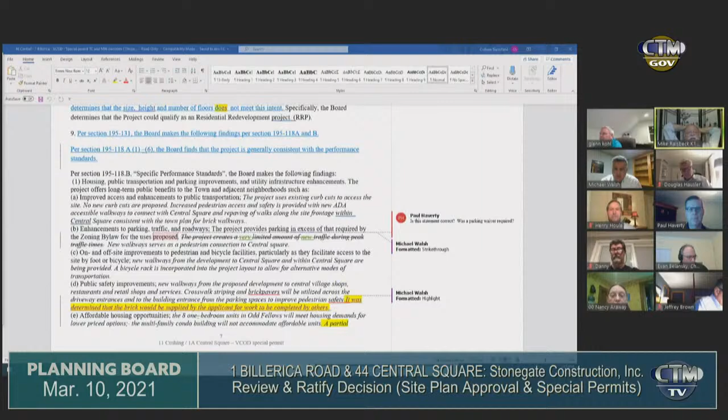So maybe to simplify this, Christina's letter is noted in procedural 7. I don't know if you want to put this level of detail in your finding, or just rely on the contents of her letter. You can take it out. I'm fine with taking it out, I'm sure it was my comment, so if you want to take it out, that's fine. If the board feels it's not necessary, take it out, if it's not accurate. Well, it's more accurately covered in the letter. Okay, take it out. Thank you, Evan.

Okay, continuing on, 9E, this refers to affordable housing. The highlighted text says a partial payment in lieu has been proposed for the creation of affordable housing elsewhere in town.

The board never came to an agreement on the PILO. We looked at the PILO, we looked at the project PILO as a whole. I think, Mike, this may have been your insertion. I think this might have been... I don't know if it's Nancy, I'm not going to put words in your mouth, but this was just directly regarding the 8 one-bedroom units. We were looking at it as a whole, we didn't get into a discussion regarding the PILO for just the 8 one-bedroom units. Correct me if I'm wrong, anyone on the board, I don't know if you remember that.

I agree with you. So since we are deliberating, and I agree, the board never really discussed whether the 8 units should include an affordability component. And I think the board understands that it wasn't necessarily calculated as part of the PILO. Are those facts as we understand them?

I would agree with that, Evan. And is it also safe to say that the board didn't express any major concerns related to the 8? No, I think it's simply more that we never got to it. We were looking at them as a whole, not individually. We discussed the PILO at length but never came to a final conclusion on the project as a whole, including the 8. We never specifically separated the 8 and talked about PILO. That's correct, that's where I'm caught on this one.

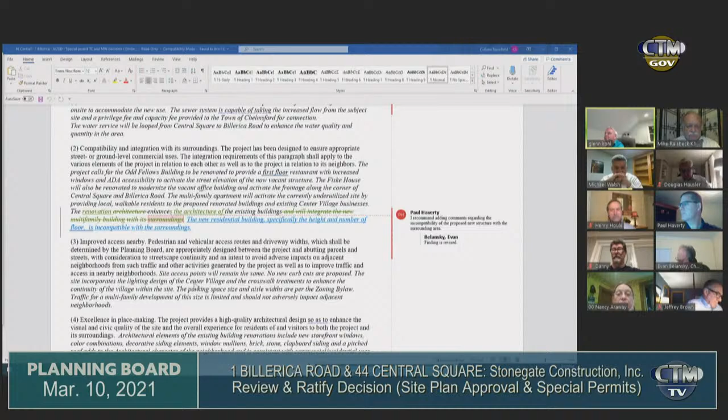Okay, next one, middle of page 9. Letter C, this is specific to the design standards. So counsel again is recommending we add more detail between Nancy's edits and my edits. I think we've covered that. I specifically included 3 floors are permitted, 4 are proposed, and a height of 35 feet is permitted and 48 is proposed. Satisfies me, that's accurate.

Okay, the next one, I think Mike you inserted this one. Right, and I inserted the next line where it says it was not determined if all mechanical units were to be screened from view. They were proposing a screen of 36 inches above the roof line on the flat roof portion. Do you guys recall that, or you want to leave that in or take it out?

I'd leave it in. It wasn't determined. The key thing here, it wasn't determined that it would block all the units when they were proposing the 36 inches high. Right, the screening was to hide the units, but like you said, if they had a couple units that were too big, they didn't address that. Yeah. But you probably should fix the spelling in it. Reno? That's why you know it's me, so. I left it in there.

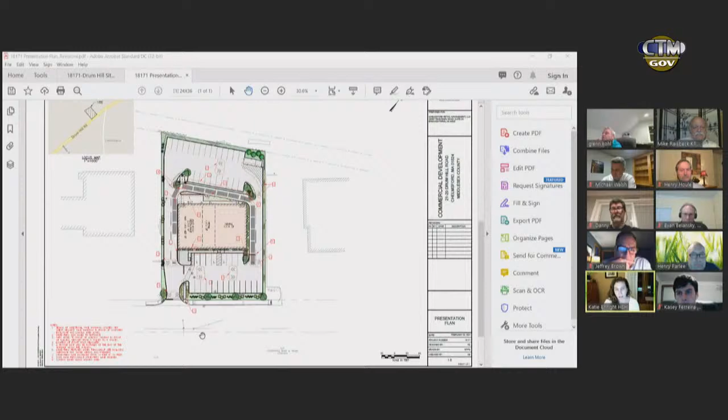Okay, this might be helpful. So this project was previously approved by this board quite some time ago. We went through the COID and the full site plan review. So we're here tonight with just a minor modification. As you know, the building right now is outfitted with the Verizon store that used to be in the previous building on the site, and a dental office. They've since found a fast food restaurant tenant for the drive-through location, and so we're here tonight with some minor modifications. Basically, these little areas in red are what's on your plan today - a lot of it has to do with parking lot striping and some additional signage, things like the arrows shown within the parking lot.

We made the drive-through lane slightly wider than the previous approval. There's some striping in front of the dumpster areas, some additional signage. The previous decision had allowed us to add a patio in front of the building, utilizing one of the parking spaces, and this tenant does require the patio, so we're showing that here, which removes one parking space from in front of the building. We've also added a bike rack to the plan and shifted the front door of that fast food unit slightly from where it was previously. So we're here tonight just seeking these minor modifications to the site plan previously approved by this board, to allow us to move forward with this additional work on site.

That's it. All right, is Christina still available? Sorry, yes, I'm here.

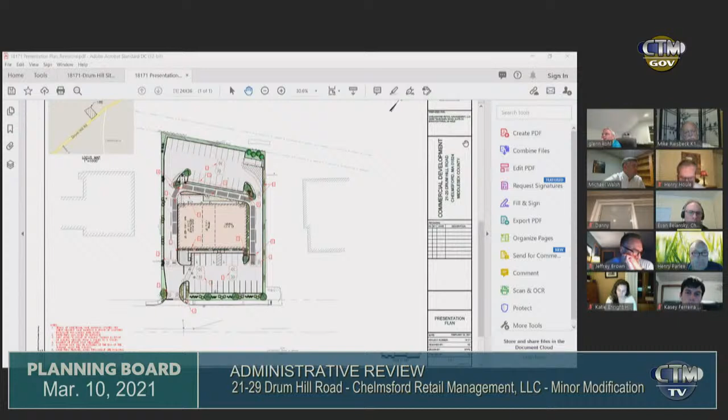You said there's a letter from the fire department? Yeah, there should be, give me one second guys. Evan, I'm not finding the one from Dan. I think you're muted, Evan. While I'm looking for that fire prevention letter, was there one from Board of Health? Board of Health didn't have any concerns. Okay. Let's see, the only one I got from fire prevention today was for 248 Princeton. I have Dan's. Oh you do? Okay, yes, sorry about that.

Dear members of the board, the Fire Prevention Office has reviewed the proposed minor modification to the existing property at 21-29 Drum Hill Road and finds the following: the fire department apparatus access is acceptable and unchanged from the previously approved site plan. The proposed dumpster location is acceptable. The only concern raised by this office is that adequate vehicle impact protection be provided for the proposed expanded outdoor patio. The Fire Prevention Office would be amenable to the developer's guarantee that this vehicle impact protection would be provided at some point before the occupancy of the 2,723 square foot proposed fast food restaurant unit. This office would approve this plan with these conditions, and I ask the board to make this part of their approval process. Captain Katufis.

I also had one from North Chelmsford Water, no concerns.

Those are all the letters. We'll put it around the board, see if anybody's got any concerns.

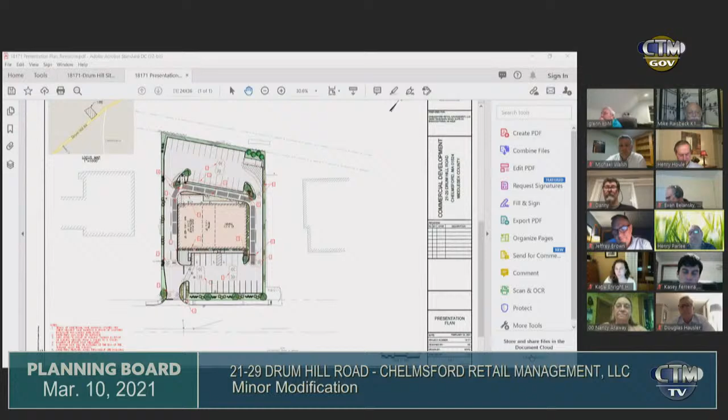Glenn, yes. Mike Walsh, yes. Mike Raisback, yes. Don, yes. Nancy? We lost Nancy again. Nancy, yes. Cool. Yes, I'm a yes, unanimous.

Moving on, the one that I think everybody here is looking for is 39 North Road, Matt Hansen. He's looking for a special permit under 195-8 for non-conforming use of structures, changes, extensions, alterations of a non-conforming structure and other structures, and any other permit relief that may be required under zoning bylaws to allow change of existing and altering of a current or pre-existing non-conforming use, two-family or a structure of a new two-family on the property.

Matt: Good evening everyone, thank you for having me this evening, good to be back. I do have Brian Melissi with me, and at this point I'd like to ask him to bring us through the application, unless there's anything else you'd like to hear from me right now. He's got all the good details. Oh, I can go for Brian.

Good evening, Mr. Chairman, members of the board. For the record, my name is Brian Melissi with Whitman and Bingham Associates, here representing Matt Hansen, who's the property owner. We're in front of you tonight, as you read in the notice, requesting a special permit under section 195-8B, non-conforming uses and structures.

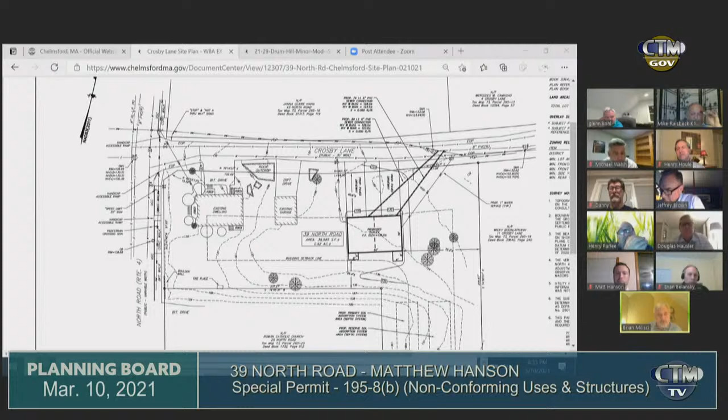All right, Colleen, you said you had a few letters on this? Colleen? Colleen? Christina, do you want to read yours? Hi guys, I have them. I'm sorry, I couldn't see anything with the shared screen up.

This one is from the Board of Health. She says the new two-family home would be required to have an on-site septic system due to the current moratorium to tie into the town sewer, and would need to meet all the Title V state code requirements. That's from Board of Health, Sue Rosa. Captain Kutufis from Fire has no comments, and Lieutenant Spence has no comments.

That's all I had. And Christina has hers too. Let me see if I can find it. I can read it if you can't find it. I have it up now. I can read it. Why don't you do it though? You're better with this. Okay.

Dear members, this office has reviewed the site plans by Whitman and Bingham Associates, consisting of one sheet dated February 10th, 2021. As a result of this review, this office has the following comments: One, this department shall be notified when work on site is to commence in order to arrange for inspections. Two, the applicant should mitigate stormwater runoff from the roof; any revisions to the drainage system shall be submitted and approved by this office. Three, a stormwater operation and maintenance plan shall be created and followed as described in the report; copies of any inspections or other reports done in accordance with the plan shall be forwarded to the engineering office.

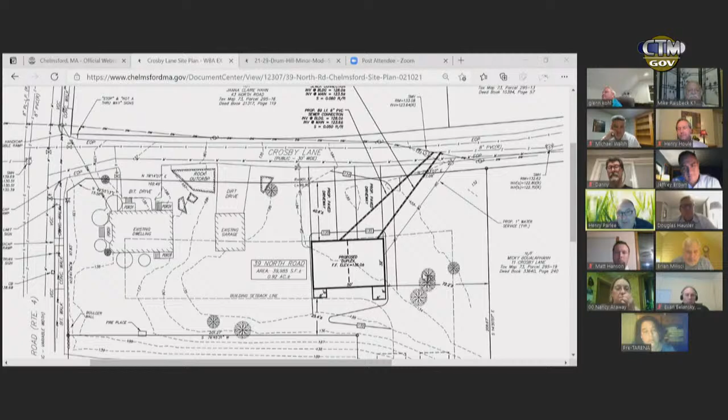I think they're saying it's the two-family, and that's what I don't understand. It's not zoned for two-family right now. But it's old. No, it's not. The lot is, but the house, the existing dwelling is, but we've got to work amongst ourselves and work something out here, but I can't. All I can say is stay tuned and listen to the rest of the meeting, and you'll get what we come out of this eventually. Okay. All right, Matt.

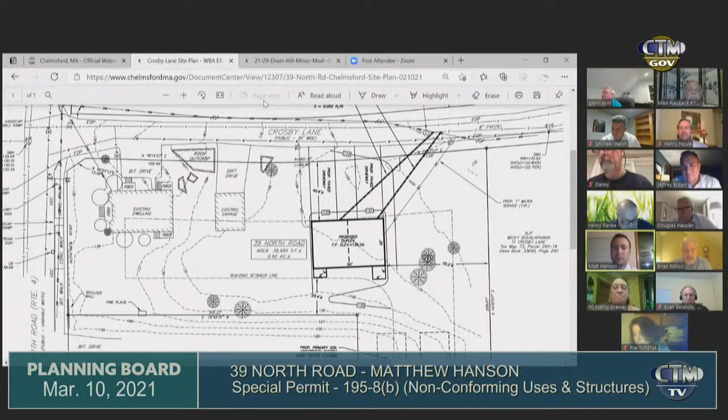No, thank you. I really appreciate all that feedback and those comments, particularly from the board and all the neighbors. Just wanted to start by answering a few of the questions that were brought up.

To that last question, my understanding is the difference would be homes built before the 1930s can legally convert now to 2-family, but that's different. This house was actually constructed as a 2-family, so it's always been a 2-family. That's basically the main difference. And I think that goes in line with a lot of the other questions about the Doyles and the Greenwoods as well. If this is approved, then there's a precedent, and other big old homes with land would just go and do the same thing. But those uses are not non-conforming.

There was a lot of questions from the board members about the specific section being applied under, and I am by no means a zoning expert or an attorney. When I first met with Evan to discuss this, he recommended I bring the whole proposal by town counsel to get his opinion on it. He reviewed our zoning bylaw in several cases and said this was an allowable use. So I wouldn't be here if town counsel hadn't said that it was allowable.

Again, not a requirement, but certainly that it is an allowable special permit application. That being said, if the will of the board is that there's a better avenue, or you'd prefer to see a zoning amendment change, I'm certainly willing to look at that avenue as well. Not trying to force something on anybody that's not allowed by zoning or comfortable with, but this path was recommended to me by a few people, and I was told by town counsel that it's allowable for your board to review it in this manner.

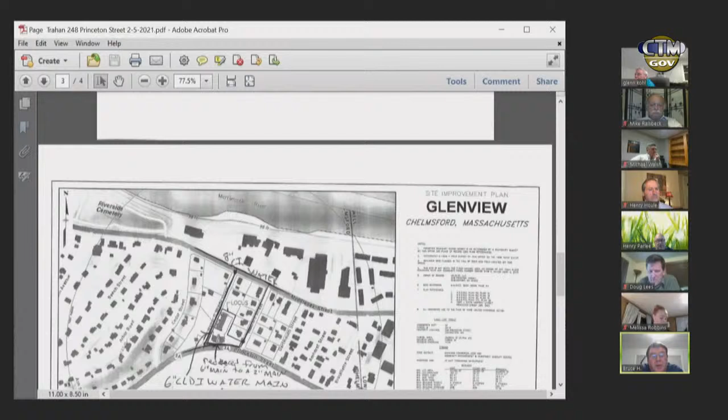I can just kind of touch base with what Doug and I have discussed, the engineer for Trahan and Page. The original plan showed the water main going from Princeton Street up Weed Street, terminating at the property line of the Merrill property. Doug and I talked, and I said we do not allow dead-ended water mains, especially where they can be looped. So I recommended we downsize the line from 6-inch to 2-inch, saving some money, and the water line would tie from Princeton Street and get a second feed into Middlesex Street. He wasn't for this, so he showed a loop going around the buildings, which is very unacceptable because all it is, is a dead end loop. It has no purpose. So that's where the plan is at now.

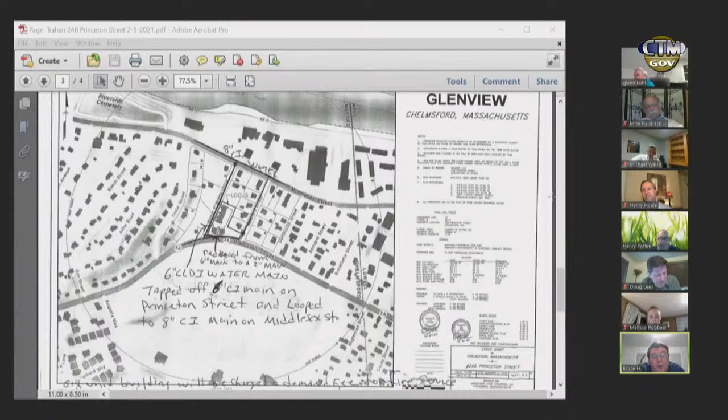The fire department, I talked to them, they're all for my recommendation. The water district is for my recommendation. And we did a water distribution master plan, and the master plan prohibits dead-ended water mains where they can be looped. So going forward with this plan, we're going to stick to our plan of the feed for redundancy from Middlesex Street to the property and also from Princeton Street to the property. I'm sure that answers your questions.

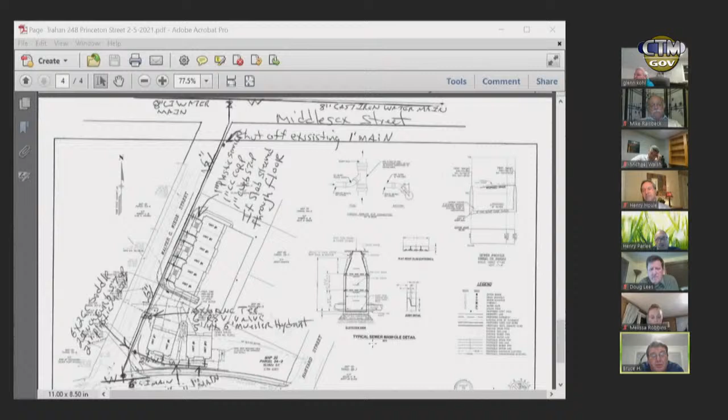So you want them to go to Middlesex Street twice, basically, right? Nope, I want them to go from Middlesex Street all the way down to Princeton Street, tie in the 6-unit building straight as it's shown on this plan that I kind of doctored up a little bit. And they're gonna run a 2-inch water main in front of the 2 duplexes, tie in those units straight. Doug showed an additional plan, which I rejected, showing a loop going around the buildings on private property, which is unacceptable.

And like I did tell the engineer, the water district has in the past worked with contractors—for instance, Groton Road, we're doing some waivers on some of the fees. With 314 Dunstable Road, they're gonna loop the water main through to Stone Hill. So we showed past history, told them that. We had them loop up to John Street.

So this is nothing new that we're making them loop the water main from two different directions to get redundancy to feed this project.

Mr. Chair, if I may briefly, I don't know if Mr. Harper has had the benefit of the revised plans, but we have revised our plans to include this loop, including the loop all the way down to Middlesex Street. That's what was noted in Mr. Hedison's letter regarding the payment in lieu of, that's the additional fees. So we are now proposing this loop as Mr. Harper is requesting.

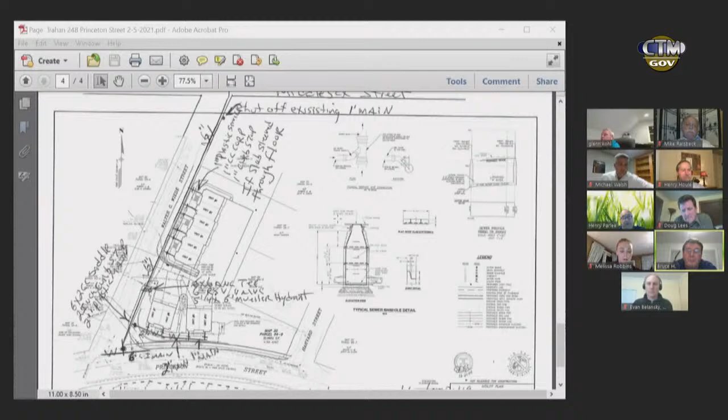Okay, I haven't seen that. I did mention that to Doug, and I didn't quite hear Hedison's letter. I did mention to Doug from the engineering firm that possibly this could be part of the in-kind service. I think Mr. Lees will go through it a little bit more specifically, but I know we're going to do some of the loops. So once we do the overview, when the letters are read, we'll go through that in more detail.

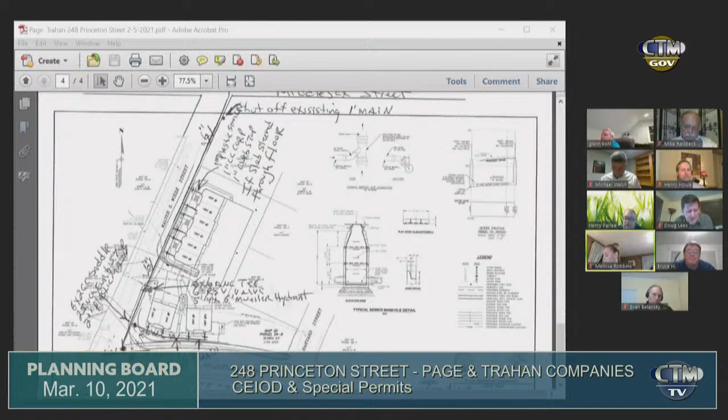And just one other point, if I could, to the chairman. This feed is also, we did some flow tests this morning up at the former training school, the University of Lowell. So looping these water mains, getting additional feeds into that area is going to help out that proposed subdivision. I'm not sure exactly what's going to go up there, but there's going to be a lot of activity up at the old West Campus. So we're trying to get as many feeds in that area as possible, and this will actually help out somewhat.

All right, Colleen, was there some others from abutters that we need to read in? I have one. Did you guys get them when they were sent to you? I'd appreciate some help reading these if you don't mind.

Should be Mike Walsh's job. Let's see, Mike, are you still there? I am, but give me a minute. Should be one from Brian Harper. Actually, while you're looking, I can read Brian's. Colleen, we also have the fire prevention letter. Oh, I have that up. Thank you, okay, we'll read fire prevention first.

Dear members of the board, the Fire Prevention Office has reviewed the proposed residential development at 248 Princeton Street and finds the following: water supply appears adequate. Required pressure and flow shall be confirmed by a current water flow test performed proximate to the site, with all calculations to be approved by this office. Hydrant locations appear to be adequate. One hydrant will be required within 60 feet of any fire department connection. An additional hydrant shall be available within 500 feet of all buildings for manual firefighting operations. Access for fire department apparatus is adequate.

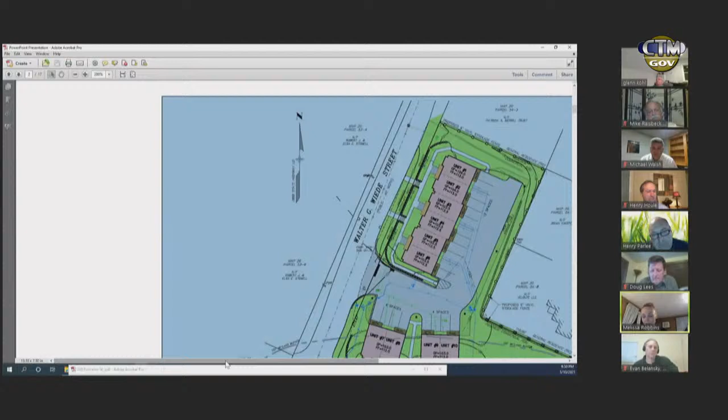As to the other technical issues, if I could just allow Doug Lees to speak briefly on those, and then I can answer the other questions that were just raised. Hi, Doug Lees from Land Engineering and Environmental Services.

I'll give you a real quick overview of the changes to the plan since the last meeting. We've increased the sidewalk width along Princeton Street to 5 feet. We've increased the curbing - we had proposed 5-inch granite curbing, and we've increased it to 6 inches per engineering's request. We've included a benchmark. We've updated the sewer layout so that each unit has individual sewer services, and those are laid out with anticipation of the water service going up Walter Wiede Street, so the sewer will work when the water is changed to address Mr. Harper's comments.

We added a little bump-out in the back top right-hand corner of the parking lot for the last parking spot in unit number 1, to back out and have a place to turn around, addressing the concerns raised at the previous meeting about the back lot line where Mr. Brian Harper's fence is. I went out there and looked - right now it's kind of a steep slope in the back, about a 2-to-1 slope, with some trees on it varying in degrees of health.

So what we're proposing to do is to grade that slope out and make it a nice stable 3-to-1 slope so that it can be loamed and seeded to be stabilized.

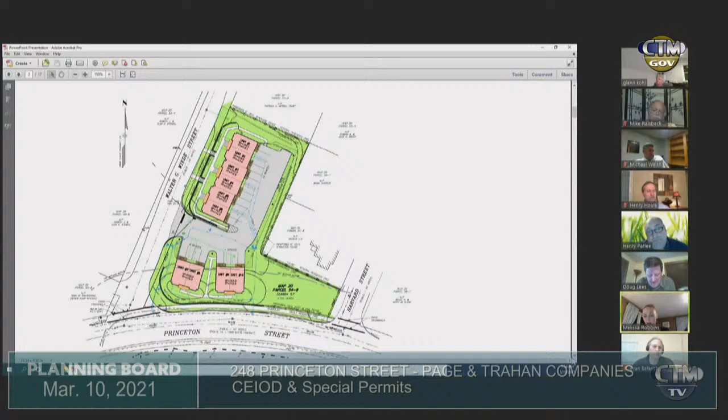All right, so Mr. Chair, just a couple other points - to Mr. Harper's point, of course we can work with him on landscaping. He is at a higher point, and oftentimes when there's an abutter at a higher point, it makes sense to do the buffering on their side of the property line if they're amenable, because it will give them better screening. So we'll reach out to see if there's a better fence type or plantings they'd like on their side. That's an easy fix to his screening issues.

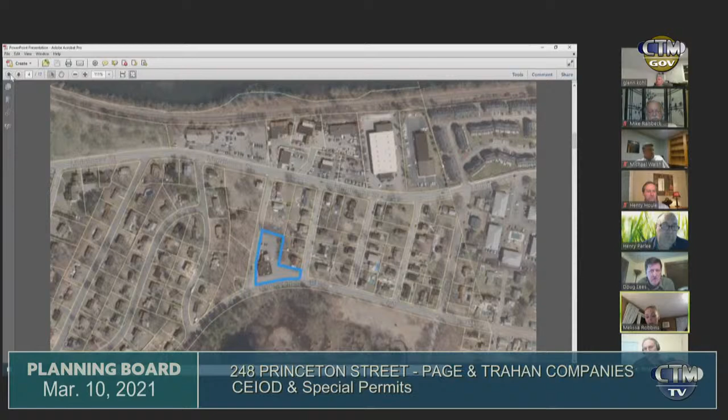Just to briefly answer some other quick concerns that were raised: we are offering a lot of mitigation on the site. This is a redevelopment site, obviously - it's underutilized property in the town of Chelmsford. We're going to redesign it to actually fit into the area, which is very residential. As you pointed out, the West Campus property is right across the street, and that will also be proposed as a high-density residential development. As part of our improvements, and even some of these offsite mitigations in front of the property, we're going to improve that sidewalk to the extent we've been asked to along Princeton Street. We also added 2 crosswalks, which were requested.

The biggest one, as we've discussed tonight, is agreeing to that water loop, which is an extensive cost down Walter Wiede, and doing the other extension so that we can improve the water line, not only for this project but for the town of Chelmsford. And as the water department pointed out, that will also help with future developments with this improvement.

I don't think I noted this at the first hearing, because I keep getting the floor at 9:45 p.m., but the market rate units for this - we're trying to stay in a price range about $379,000 as an initial price range. I think the board would agree that for the town of Chelmsford, for any new construction, that's untouchable. So when we're talking about market conditions, our sales, our prices per square foot, we're trying to keep it at that starting point. So that's where our market rate units are at.

As for applicability, the abutter is correct that there were lots of discussions at the applicability, but at that point we were at 12 units. We came in for an interim discussion with the board in October to discuss perhaps decreasing density before we went to full design. With the abutter comments and board comments, that's why we went to 10 with the payment in lieu of, instead of designing out the 12 units that had 6 to the front and 6 to the side, both on Princeton and Walter Wiede. I'll talk fast, I promise.

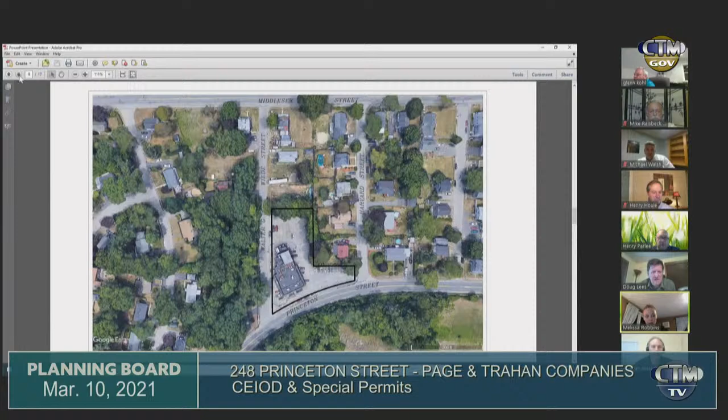Do you have a landscape plan for this showing any plantings along the streets at all? I know I saw the wall there before. If you go down, Colleen, to like slide 13, I think it was there - Mr. Lees had gone through it briefly.

Yes, okay, so this was the landscape plan that was presented. Doug, if you want to run through it quickly - the landscape plan has some shrubs, plantings in the front of the units and at the driveway entrance, and some evergreens along the back fence and the side. There's ivory silk, red maple which is deciduous, a lilac, white firs at the corner right here, and there's a little pocket park down in the grass area to the right.

Colleen, if you go back one more slide to the colored rendering, you can see what we're proposing - this will be a little different now because the walkways on Walter Wiede will come out to where that white car is going, with two walkways leading down. We're also proposing to rip out all the pavement there today and green up this entire area. We'll build a fence along almost the entirety of the property, except in the front, where we'll stop the fence and put in a front wall leading into the walkways, for a much nicer residential design coming in and out of the property. There will be some modest signage in the front, properly landscaped, and landscaping in front of each unit, as Mr. Lees pointed out. The only difference from our final plans is that we'll go speak to Mr. Harper about the trees and the fence in that corner.

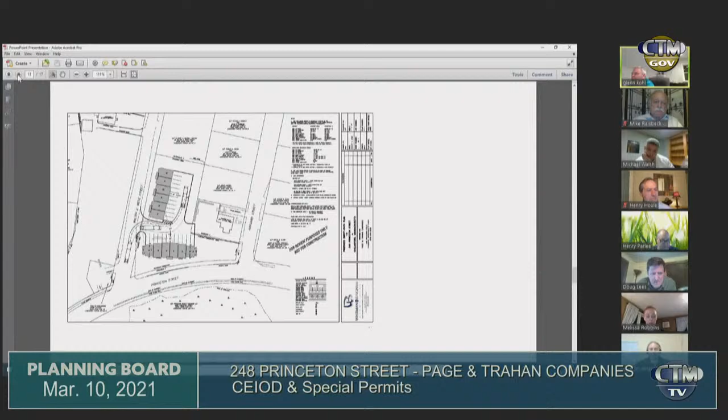All right, I'll run around the board one more time. Glenn, got any questions? No, I think I'm happy with the way it looks. I think I'm fine with it. Nancy, no issues, no questions.

Mike Walsh: No, if you can just, Melissa, as you mentioned, Mr. Harper, the neighbor, and the other neighbors, just appease them. I have no issues with this project, if that can be taken care of.

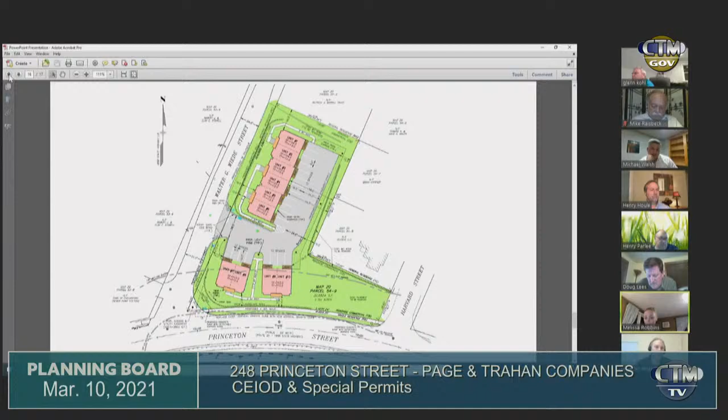Yeah, I think Mr. Walsh, a lot of the other abutters' comments are technical in nature, as to the CEIOD applicability and the CEIOD principles themselves. A lot of the sections he discussed that we are not meeting, we actually are either by right from the underlying zoning or CEIOD by right. I think we could probably address those in the facts and findings when we draft those, so we can make sure those issues are ironed out. But I'll go back through his comment letter and make sure there's nothing else outstanding to address.

I forgot to mention one other point regarding Sue Rose's comments. I'm not sure if that was meant for this development, because this is not a commercial development, this is a home ownership development. So I will reach out to the Board of Health too, to find out where that comment came from, because we're proposing private curbside pickup, as typical with any private residential development. So I'll address that as well.

So Melissa, just one quick question to follow up regarding the abutter. How many trees are you taking down on that north side? When we went back to do the regrading, I know there were some trees in that area between Mr. Harper and I think Colleen.

Oh yeah, go back to that one, the landscaping plan, because you can see it's fuzzed out a little bit. Oh yeah, there's some tree line there. And to the extent that we can keep trees, we always like to keep trees. But if we have to run that tree line, or run that fence line back to fix the grade to address his grading concern, then we obviously have to take the trees down.

But we'll address that directly with him to see exactly what we can work out in that area. I think the answer will be to maybe put a fence up to match his fence line, on maybe his side of the property, because that's obviously the highest point, and then maybe do some plantings on either his side of the tree line or our side to address his concern. That way he can have the best of both worlds for buffering. Great, thank you.

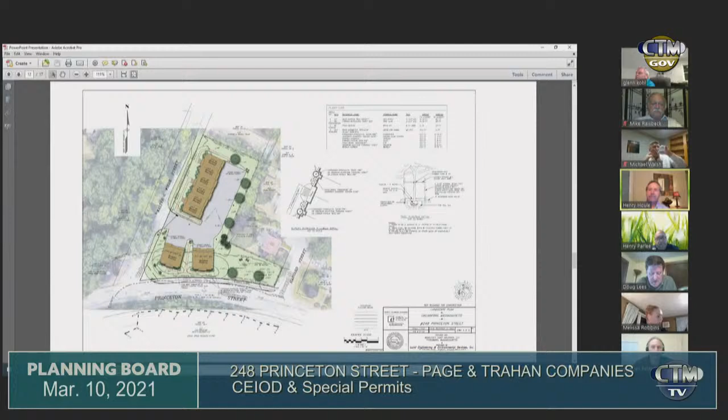Hank, still no issue. Doug, no questions or concerns. All right, now the only other thing we've got to talk about is a payment in lieu of. Yes, and I can speak to that quickly.

I did meet initially with Mr. Hedison at the beginning of the project, but I asked him to hold off making a determination until we figured out what other mitigation would come in. And then we had the water comments come in, and obviously agreeing to that water comment substantially reduces the amount we can pay for a project of this size.

Well, I mean, that would be one of the factors we would take into consideration. Do you have any idea what that will cost? I think, and I know my client's on the line, but with rising construction costs, I'm afraid to guess, but right now on the pro forma, we were guessing somewhere between $65,000 and $85,000. So we took the number in between and said 75,000.

That's not including the connection fees, as Mr. Harper points out. They may negotiate that with us, and we're not even carrying that number right now on our pro forma, but we estimate that's the construction cost for all the water lines.

And you said you're doing a small pocket park. Is that for public or just for yours? The pocket park will be accessible. It's an open green area. Obviously it's not going to be public space with a public easement and all that, but it would be accessible.